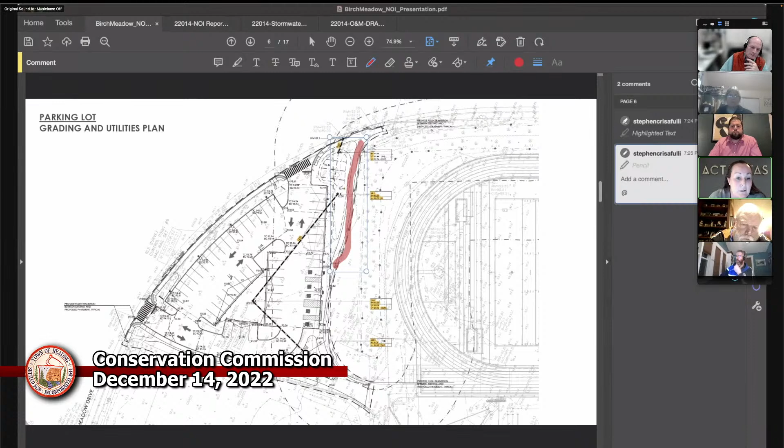The vegetation in that area—remember that orange line you saw before—you can see in the existing tree line that, for the most part, the walkway is within already disturbed area, maintained lawn, just beyond the gravel parking lot that's there now. There's one little spot near the electric charging stations where that brush wooded area juts out a bit, so we'd have to remove some brush. I don't think we have to remove trees, but Steve, correct me if I'm wrong, from that specific area. We have a bit more in the actual parking lot where we're moving some wooded area, but it's displaced from the zone of natural vegetation adjacent to the BVW.

I should say, for mitigation here, obviously we're going to have straw wattles, silt fence, and everything to make sure that during construction we're mitigating any erosion and things like that. We will have requirements for the contractor to provide a SWPPP early before they start work out there, to show us their additional measures, should they have any reason for dewatering and things like that.

Steve, why don't you go down to—I'll keep going and then we can come back, if that's okay with everybody. All right, why don't you go to the grading plan for this one, Steve?

Okay, good. So this walkway—you can see this is a long, pretty flat walkway. So the ability to actually collect that runoff and send it to specific low points or infiltration basins becomes a bit difficult. As we look at the drainage for the entire site, I didn't look at these small specific areas individually; I looked at the site as a whole in terms of the drainage analysis, because it's important to see where all that water is moving to. We're able to send so much of that water from the parking lot to those infiltration areas that we're still able to meet the stormwater standards.

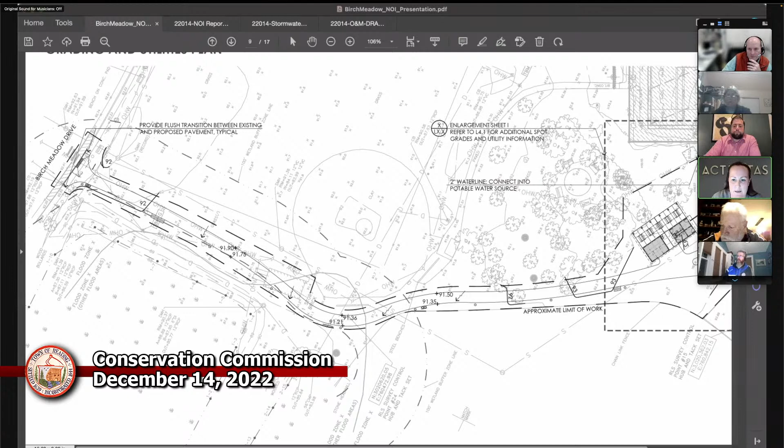That's kind of it in a nutshell. I'm happy to take questions, if there's any. Yeah, if we'd like to open it up, Chuck.

I had, can you just go over the variance request too? Yeah, absolutely. So the variance request is a request - let me just pull it up so I can make sure I get my wording right here.

So we are requesting for work within that 35-foot buffer, the 25 plus the 10-foot, on both sections of the project there. We don't really have footings necessarily involved. There's no structures, no walls, things like that, but we do obviously have the base profile associated with that gravel - this asphalt walkway here, and then the gravel walkway up at the parking lot area. So we are asking for a variance to allow for work in that area.

In terms of mitigation, we have our erosion control mitigations, things like that. We are planting adjacent to those areas as well. And then I know as part of the sidewalk, you guys talked about potentially doing some removal of invasive species in these project areas, which we would certainly be amenable to.

Okay, is there anybody on the commission that has questions for the people from Activitas?

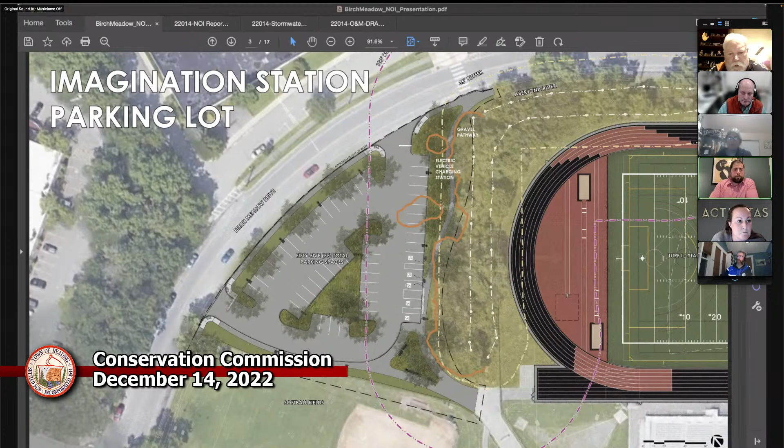For here, for this walkway? No, I was thinking it was the ADA one down across the ball fields, but you were talking about the one up by the school? No, there is a small portion.

Okay. So then my question is, did you consider moving that walkway a little bit so you wouldn't have an encroachment at all?

So right now, we're removing this green storage building that's out there, but the utility poles have to remain as part of a strategic phasing of removing the overhead electric.

Okay, so it's dodging around the poles. Yeah.

And you said this is a strategic phasing. When do you think the phase would be that would remove the poles or move them? I can't say that, I'm not going to speculate. The reason I'm asking is, could we put a condition in that once the poles were moved, then the walkway could be adjusted to stay out of the area?

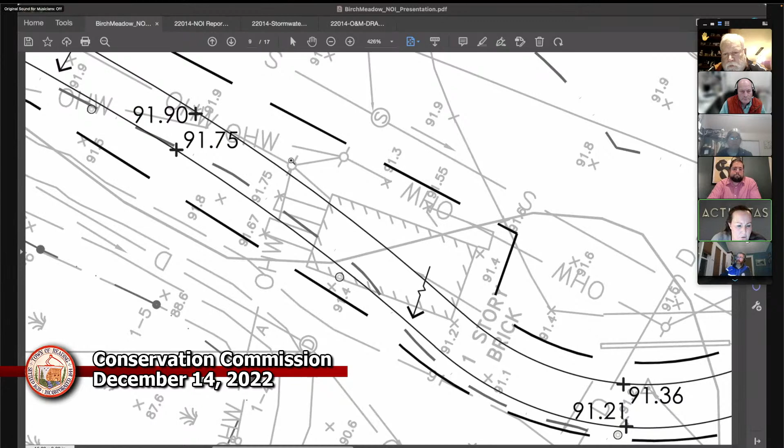I think, just think about this, Steve, because right now there's no natural vegetation in there, right? Because, correct me if I'm wrong, but that field, or the BVW area down there, is a maintained field that gets used, is that right?

For some, the wetland associated is more about less about wetland species and things like that, but it's more about the hydric soil profile, I believe, if I remember correctly. It does have wetland vegetation around the edges - cattail in particular are very noticeable on most sides of that field. But yes, the middle of the field is mowed for soccer and then flooded for ice skating in the winter.

Gotcha, that's coming very soon if not already, right? So I guess we could think about that condition. Certainly if that's - I think we could make that work. I would say that I don't know that it's necessarily gaining us a lot. Okay, so - you know what I mean? That's fine, in the interest of trying to keep this short, but that's fine. I get that situation there.

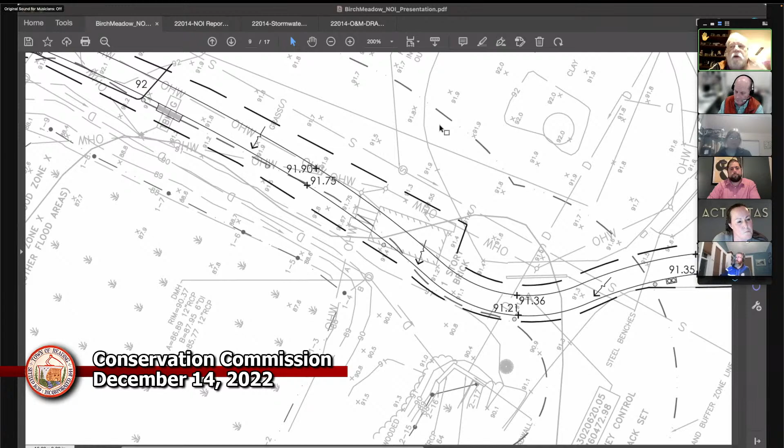The one other question I have is back up at the parking lot across from the school. You talked about the stormwater, the rainwater - what about snow? I would presume that plows would naturally push the snow from left to right, therefore pushing the snow towards that waterway over there, right? So wouldn't the surface pollutants go with it, and they wouldn't necessarily make it to any of your catch basins or treatments or the rain garden?

Yeah, I think that's a good call. I think, as part of the O&M manual, we did submit an O&M as part of a draft. We can add to that O&M manual as a condition if that's amenable to the commission, to show where those storage areas should be. Really, we shouldn't be pushing snow towards the wetland area for exactly the reasons you're talking about. So let Steve and I talk with the town internally about where that snow would go, whether it would be stored in the parking lot or whether it would be removed and pushed elsewhere. But we'd certainly be amenable to a condition saying that we need to provide more information for snow removal as part of the O&M.

And perhaps we have a guardrail kind of closer to the infiltration area, so that really starts to limit the ability to push snow in, which is good. But I can see your point.

We'll just need to make sure that we tell everyone where that snow can and cannot go. I ask because there's not a lot of great alternatives to that side. If you go up where it's curved, that's where the sidewalk is over to the school. People will probably want to cross over there and go down to the bottom, which is on the ball field. I don't know how easy it would be to push snow there, but it's a question worth talking to the town about.

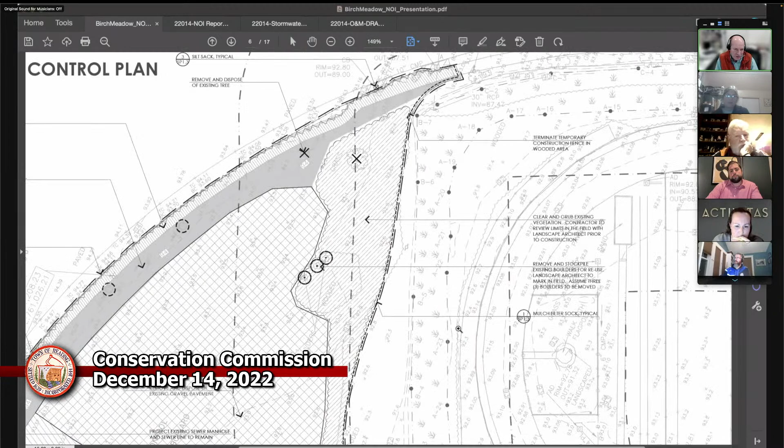On this plan, if you zoom in to where the path is, but really what I want to look at is those parking spots that butt up against the natural grassed area. Looking at the plan, I see this rough edge of vegetation that's there, but it doesn't show where the parking area is and how much square footage you've cut into this vegetation area. The new parking lot cuts into that, and from my calculation, the area seems to be about 2,000 square feet.

There's a spot screened south, and a larger spot north, and you can see where it says wooded and boulders, with some elevations, 93.1. I'm wondering, was there an opportunity to take some impervious area and create pervious area somewhere, to replace that amount of perviousness going into this parking lot area?

I also thought there might be an opportunity, even though it's late in the game, to move some of the parking area, shift it toward the left-hand side where that island contains the bioretention area. Shift it up a bit, which wouldn't make a straight line of all those parking spots. But the main question is, did you look for a spot to replace that 2,000 square feet?

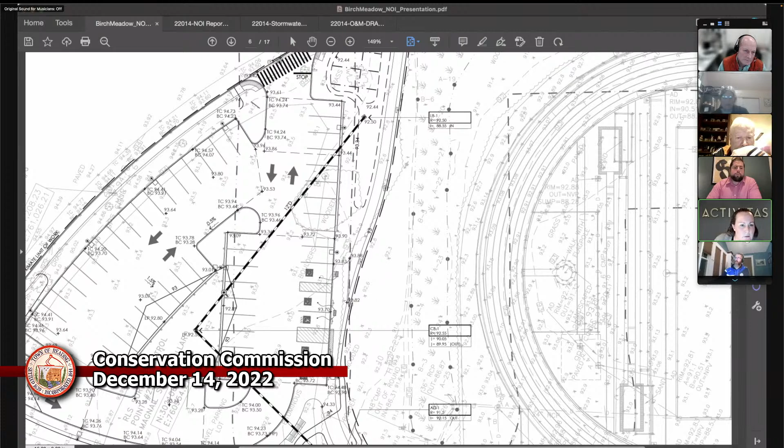Steve, can you maybe talk a little bit about planting areas? Because I think that's something we can look at in more depth to provide that, for sure. I think it's difficult doing that right adjacent to the wetland area side of the pathway. But there's got to be other areas we could fill in, especially as you go north with that gravel path. You can see the existing vegetation bows in towards the wetland, and we could start to fill those areas in, things like that, for sure.

I thought that path was interesting too, because it looks like, I was wondering, is it pavement, that paved parking or paved walking path that enters into the gravel walking path? Is there an opportunity to increase the gravel and eliminate more of that paved walking path? I think that's up by the roadway, it seemed to be like a cutoff line. I thought it was lower down, but...

I don't know where that line is, if it's under this, but it really should be that. Well, if it's not there, that you've picked up some, and maybe at the other end too, there's an opportunity.

Where it's paved here? Well, I'm only talking about the path. I think the pavement's needed, that's probably where most of the people are going to go, but it's hard to tell where it changes from stone to pavement on this plan. But if there's an opportunity, maybe that's where you can pick up some of that 1,500 square feet.

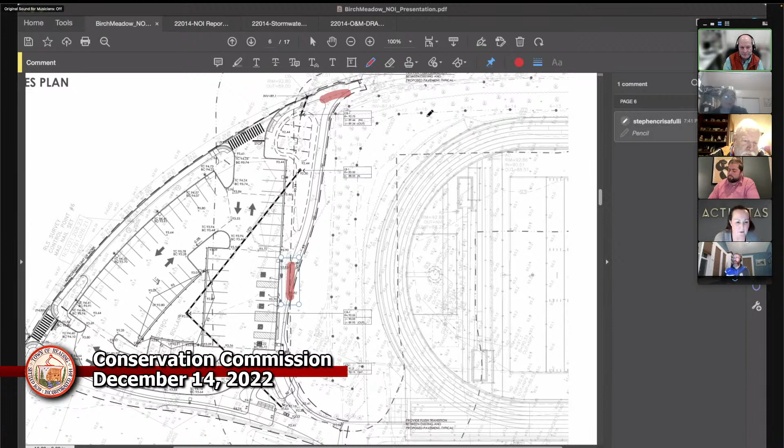Yeah, sure. So it's funny, I wanted there to be storage, but there really isn't. It's not because we can't provide the storage, it's actually because I can't treat that water before sending it to that storage area, because that storage area, unless we line it, is going to want to infiltrate.

So from a treatment standpoint, I need that deep sump catch basin in the middle to actually collect that water and then send it to the rain garden, page north there, to either continue to outlet by the leaching basin or overtop the leaching basin and then go to that rain garden.

So there's just not a lot of space there. There's different things you can do to allow for that treatment, but that triangle gets so small, like you want at least almost 15 feet of grass area to treat it to meet that standard.

So that's where I got stuck, because I wanted to use that area for detention as well, but I couldn't make that model work in terms of treating it first before allowing it to infiltrate in that area, if that makes sense. It sounds silly.

But even if it couldn't be added to the calculations, it seems like there could be something, because if you have some of those smaller storms, and obviously if this is a grass area — one of my questions was, what is happening to these areas? Because in the details, one of them says plants and seed mix.

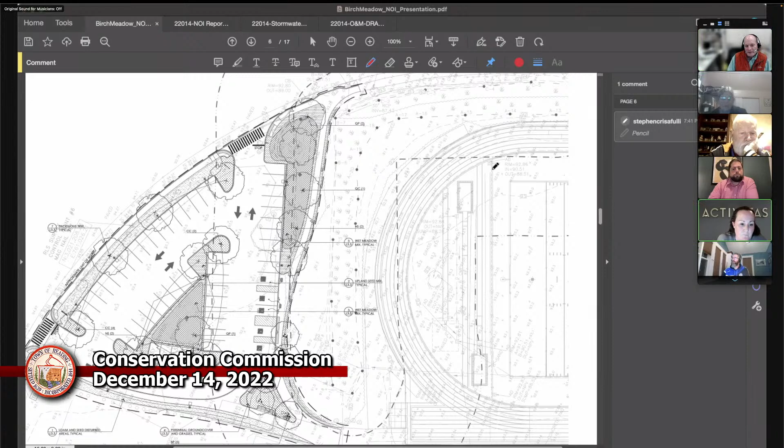I did have a question. It looked like once it goes in that storm drain, it diverts into two directions. I understand page north, the bioretention area. Is it going down to the bottom, page south also?

No, so page south is going towards that middle island. Okay, yeah, and then it's traveling that way. Exactly, so it's picking up whatever's happening in the pathway and the center area, and then...

And what size storm are we capturing here? What are we looking for? I mean, we model up to the 100-year storm per the regs, so we are designed to handle pretty large storms.

We shouldn't see ponding in the page south and page middle areas, if you will. We will see some ponding as part of that infiltration and rain garden area in that larger storm. But in the small storms, like the 2-year, we shouldn't really see standing water anywhere.

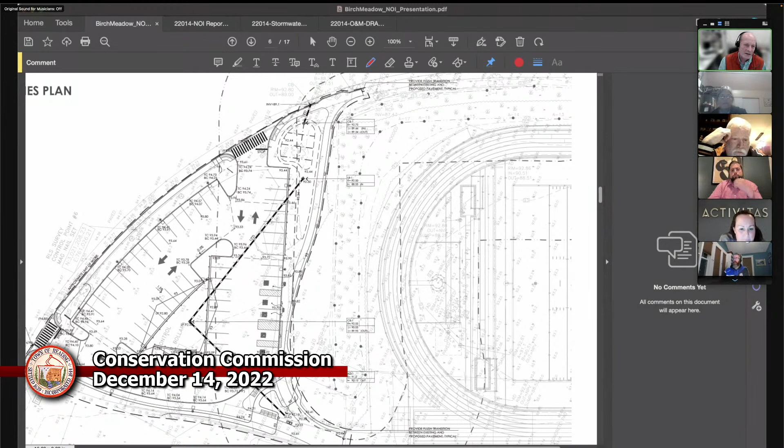So I can't read the invert. It's like... 9278. So 9278 is the 100-year storm. So when it starts to discharge at the 100-year storm, a 24-hour 100-year storm. Yeah, let me, you know what, I can get that number for you.

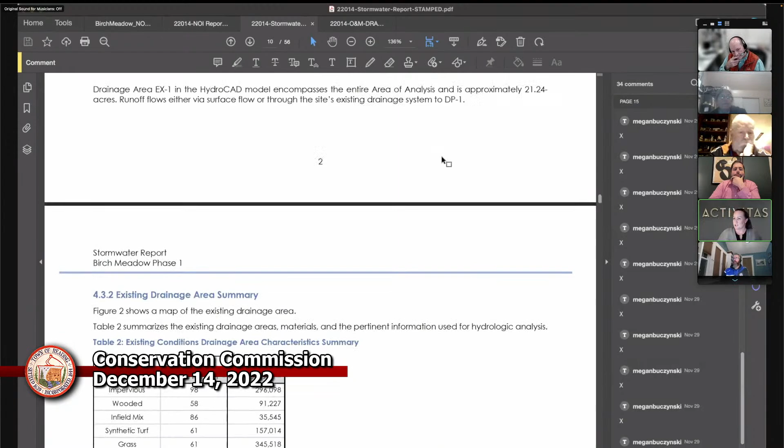What is it, the NOI or the stormwater? For the stormwater, let me go to the 100-year. And let's see, my pond AP. So where am I here? So my peak elevation in that 100-year storm is at 92.

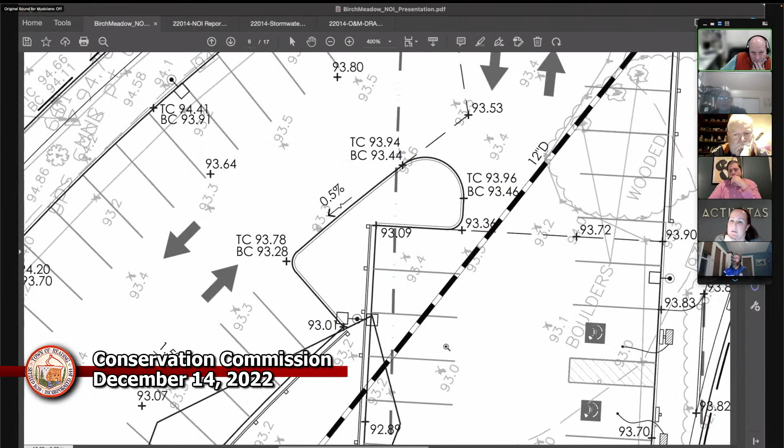Steve, I'm sorry, why don't you go back to the plan for one second? Yeah, so 9278, I think it was, is the invert. So, Steve, why don't you zoom right into that infiltration area up top? Sorry, the up top one. There we go. So you can see... oops.

There we go. Yeah. Okay.

We're getting water in that leaching basin, and our rim is up at 92.5. So water from that middle area is able to get in there and naturally overtop. When all of these systems are working together, we're going to see most of that not ponding in - it's going to go into that infiltration area, but we shouldn't see standing water even in those larger storms, because the soils out there are B soils, so they're reasonably well draining, which is great.

That water is able to go through that rain garden profile and go right through. The way I have the infiltration basin modeled, we have that rain profile, and then the outlet from that catch basin at the top with the pipe only gets up to elevation 92 within that profile. So ponding-wise we shouldn't see much, but we will see water coming out of that leaching basin initially to get into that area.

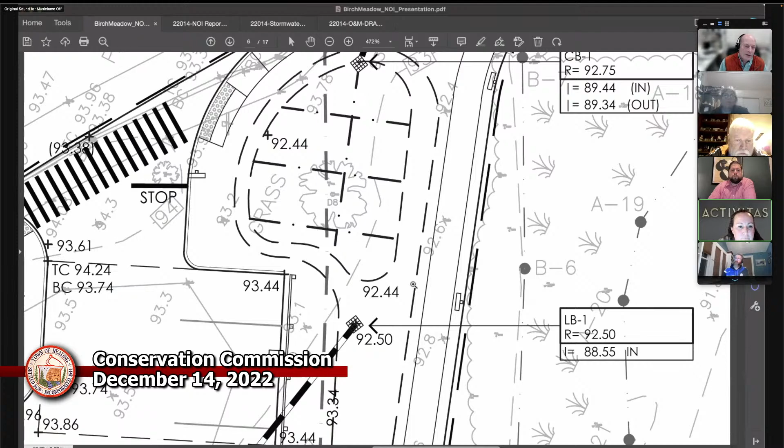Okay, yeah, that's great. It seems like there's a lot of area that it's taken care of. I mean, everything is being directed in there, and the center area that doesn't hold back any of that water really seems very important to try to hold back something.

I know you looked at it - is there any way you can? So before you do that, what was the reason why it wouldn't work? I mean, because you said it wouldn't. It needs to be bigger to make any difference.

So by the stormwater handbook, when you send runoff to an infiltration basin, you have to treat the water - you have to do some pre-treatment to it. If I included that middle triangle as a detention basin and I'm just sending water, I'm not treating it enough. So from the handbook standpoint, it's not clean enough that we want to be sending it into the groundwater.

So when I do my treatment train and my TSS, we are accounting for street sweeping in the parking lot area, and then I account for that deep sump catch basin to treat that water, and then send it to that leaching basin, and then overtop into the infiltration basin for infiltration.

But I think to your point, Chuck, what we could do - because I have the rim of that catch basin in the middle at about 92.5 - we could raise that up. Water's still going to get there, but we could slow it down. I think that would help, to your point - we can use that area to decrease the flow of the water, to slow it down before it moves over, which I think balances out with what you might be looking for.

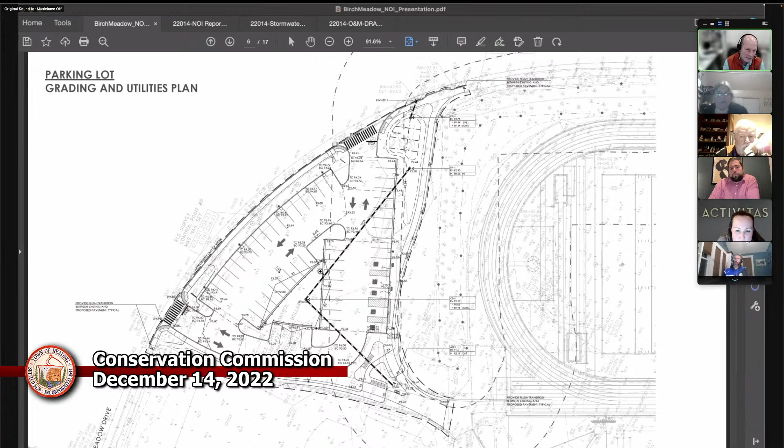I was wondering where groundwater is, because we know the elevation at the bottom is 92 something. I wrote it down, I really can't see it - 92.44. Is that where it is over there? Yeah, we're at about 92.5.

Right, so if you're not in the groundwater and you use a wetland seed mix - I think Steve and I can talk about that. We could probably turn that into more of a meadow mix. So we're not going to have the hydric soils, but we can still have the taller grasses, the wetland flowers, meadow flowers, things like that, which also helps slow down that water and provides treatment on its own into that area, as opposed to just having maintained, short grasses.

So this one down here, I think it would benefit from some shrubs, but is the other one at the top of the page, the north screen, going to get some shrubs mixed in with that? Or is it just going to be grasses?

As of right now, there wouldn't be shrubs planted, but there are shrubs within these seed mixes. The seed mixes were submitted on the planting detail sheet. There's two types, even though the supplier terms a couple of them wet meadow - it's not necessarily a wetland planting mix, but it's a mix of native grasses and shrubs. That'll come up within the first year.

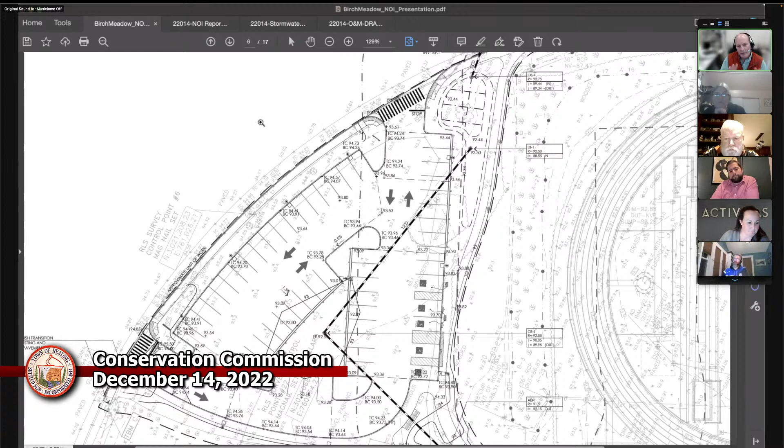So I have some concerns about snow plowing and where that stuff is going, pushing it into the rain garden. Hopefully there's enough guardrail to prevent that from happening. And the operation and maintenance plan takes care of things like spring cleaning.

So the photometrics, yeah, this is a good one. That area off the parking lot seems to be elevated a little bit. Can we get down to 0 as soon as we hit the grass? Or maybe even at the edge of the path? Is that possible?

I think that's the stream where it's 0 now, but if we bring it back to the path, would that be possible? I don't know if that makes a big difference, or if these slight changes can happen.

And then you have some numbers that are pretty high in here, like 3.0 just off the grass, but right next to it is 0.9. So I was wondering why we're getting that fluctuation.

That's kind of center screen of the photometric, right in there. Am I seeing 3.3 next to that? 0.9, yeah, yeah, 2.1 to 0.4.

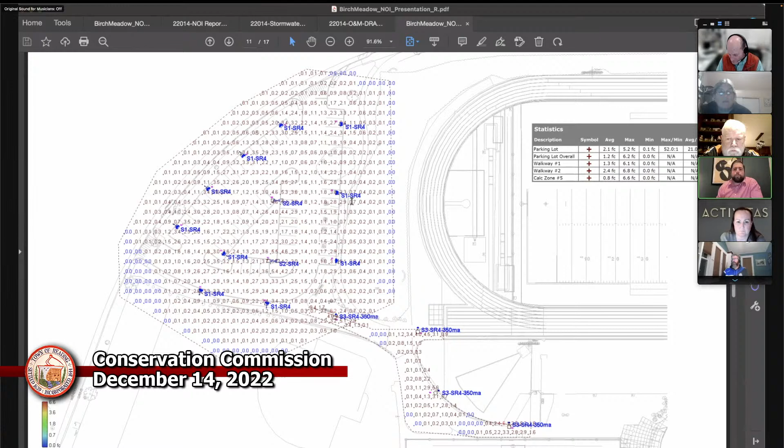We're continuing to have that conversation with the town and public safety. And the same request is for where the Aberjona is.

Up at the other side, near Castine Field and the walkway, where it dips down over the head wall, I guess, the opening of the culvert where the Aberjona is, right there.

Now I understand the pathway drops there, everything drops, but maybe if we can just pull those back a little bit. Yep, we can take a look at that again.

And then I just wrote on here, this will be my last questions. I'll write my questions down and any of the commission's questions and send them to you. The ones I didn't get to, you'll come back to because of the file number.

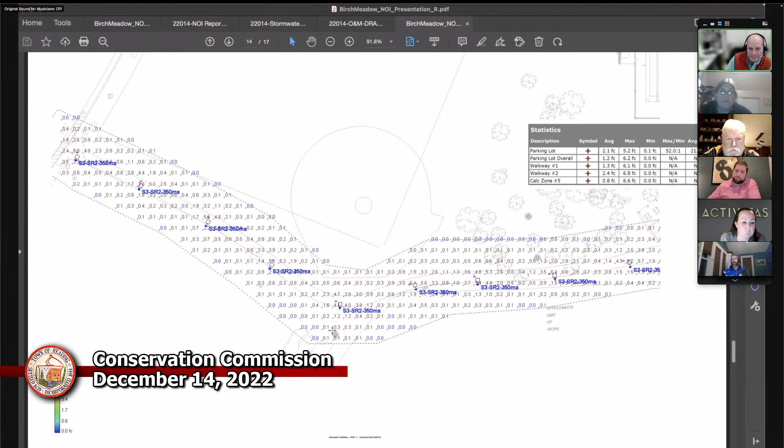I was wondering if there was an opportunity to put a bench on the path we're talking about, for that Imagination Station area, somewhere in there to have a bench. I'm imagining this is a much better environment than it is now. It gets mowed a little bit, is nice. We have the flowers and the streams cleaned up because you're doing the invasive removal and all that, and that's getting monitored. So it would be nice to think about, and I know every bench costs that much more, but that's my request for this area too.

Yeah, that's what I have, Chair. Okay.

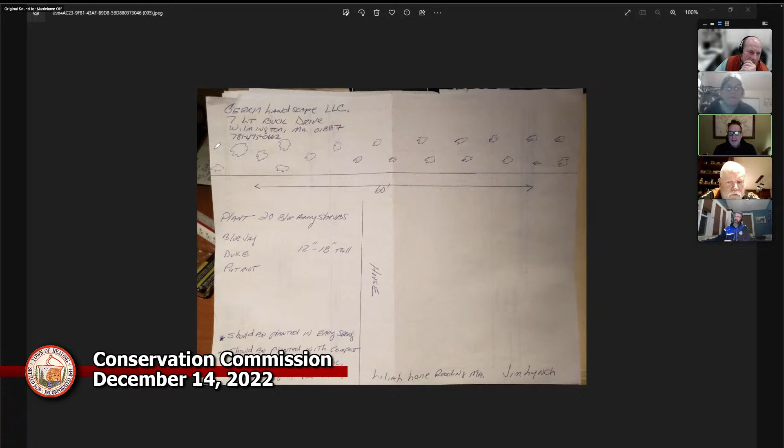Okay, so Lilah Lane is here. Yeah, Lilah Lane would be, yeah, all right, sorry. Just quick, I didn't know if they wanted a professional plan or just this, 'cause I did the house next door, 31 Lilah, the Prior's house, and we planted about 15 or 16 blueberry shrubs back there, and they're doing pretty good now, actually.

So here's the house, yep, that's a pool. Here's the wetland, Lilah Lane, and this is the side of the house, yes, left side. Okay, anybody on the commission have questions for the presenters?

Okay, so we're only concentrating on the side of the house. I know there was some trees in the back of the house. Are you still proposing to remove those trees?

You told me on the left side of the house where... okay, hold on, let's see what Tom says about that. So right now, Mr. Garin Landscaping only said that it's the left side of the house where that row of trees is coming out. That's where he's gonna do the planting.

So we still have on the agenda to take out all the trees we discussed, but you wanted a planting put in with a specific amount of plants. Talking with the homeowner, Jimmy Lynch, I assume Mr. Garin was talking with them, they decided the planting, instead of putting it behind the house by the wetlands, it would be better to put it in between the houses, so it still gives a buffer. That's what I'm getting out of it.

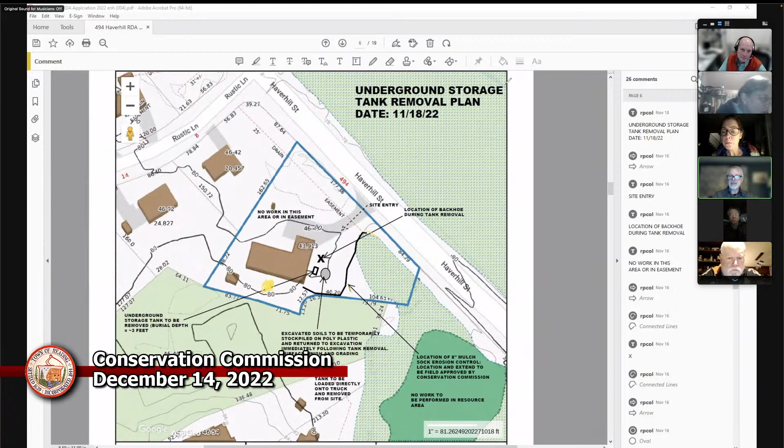Okay. All right, so this gravel area... Okay, that answers my question.

All right, we have a lot on our plate. Are there any more questions? Carl, you've still got your hand up? Oh no, I just answered, did mine. No, I'm good. Any members of the public here who have any questions, please use the reaction function and raise your hand. Seeing none, can I have a motion?

So I'll make a motion, this is Brian, for a negative determination for 494 Haverhill Street. This is John, I'll second. Brian Bowe in favor. John Sullivan in favor. Carl Sacconi in favor. Martha Moore in favor.

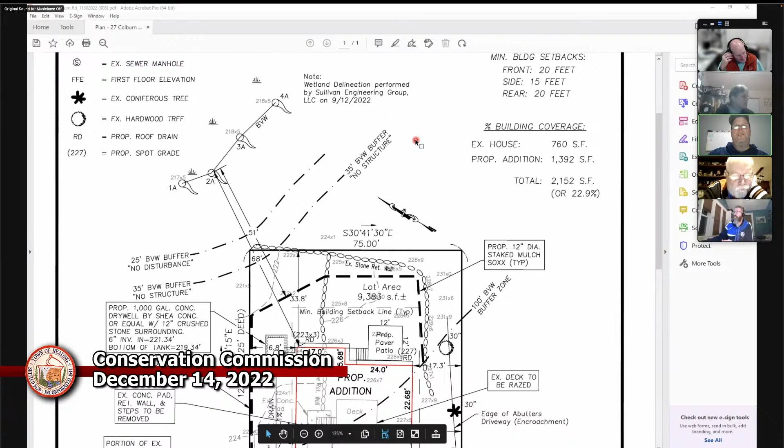As some mitigation, we're looking to collect... what do I have going in there? I have a 1,000-gallon dry well with 12 inches of stone surrounding. That'll collect the addition roof area, so there's roof drains that will tie into that. Additionally, the driveway will pitch back to the house. The driveway, as I stated, is outside the 100-foot buffer zone, but there'll be a trench drain, and that'll be drained back to that dry well as well.

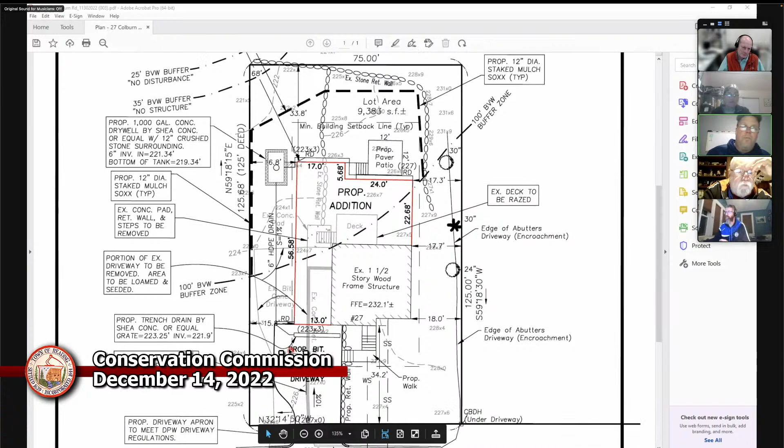So twofold, we collect some of the roof area and we collect the driveway runoff. So, Jack, can you combine those? Roof runoff is clean, driveway needs pre-treatment. Yep, I probably should put some pre-treatment on it. That's a good call, Chuck. I should put some sort of pre-treatment structure in line from the trench drain to the dry well.

And that about does it. They are proposing a paver patio, 12 by 12, in the back, right in that area. And the rest of the area within the limit of work, which is currently grassed, will just be reloamed and reseeded in the backyard. I'll turn it over to the commission for any questions you might have.

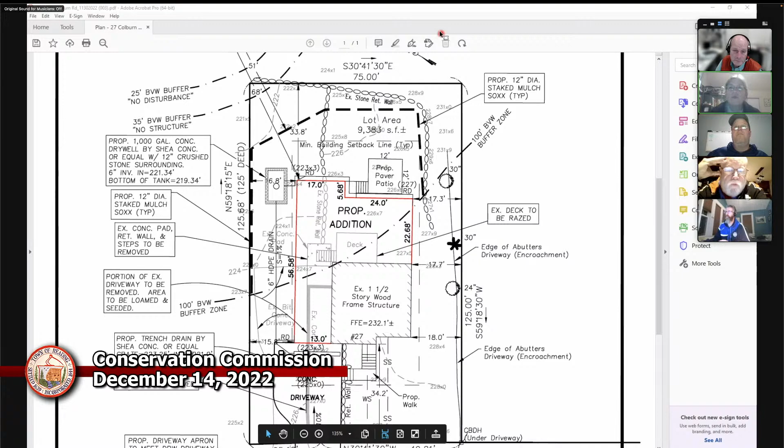I see at the top of the plot plan, just out of view right now, you've got square footage. I don't see any place where you've accounted for all the impervious surface that you're taking away, like the driveway and the deck and the concrete pad. Does that really matter?

Not in this case, because we're not in the Aquifer Protection District. We're not within a riverfront area. Above where the site plan is, I do a percent building coverage on the house and the addition, but that's for zoning compliance to show we're under 25%. Typically if I was in the Aquifer District or if this was a riverfront property, I'd want to quantify the amount of impervious removed and added, but in this case it wouldn't apply.

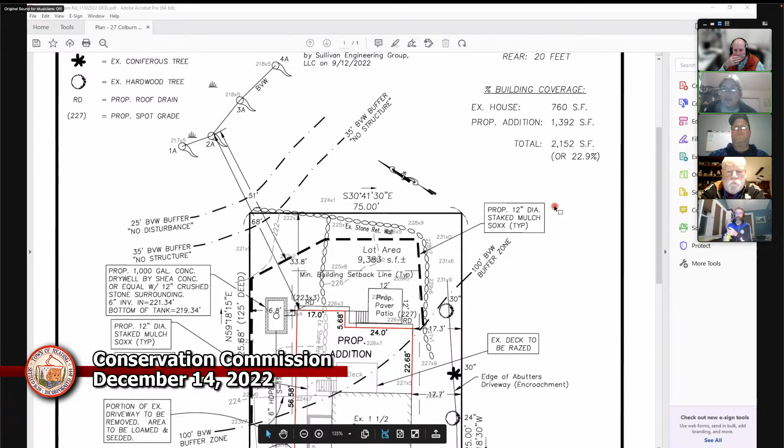Okay, thanks. All right, so I think we can go through this relatively quickly because it's so far from the wetland. But are there any questions from members of the commission? I don't see any. Okay.

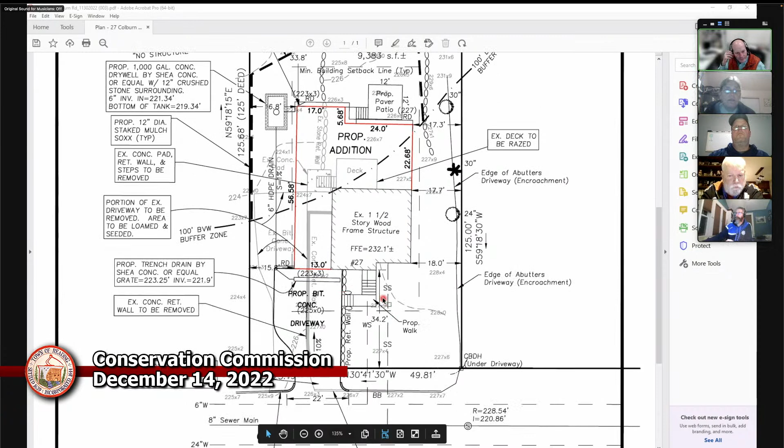Chuck, do you have anything you needed to ask? No, I don't have any questions outside of the notice or the determination that we sent out to you for this. It'll require 72 hours notice. And then I'd like to get a construction schedule, which I don't usually ask for RDAs, but it would be good to get it on this one. I can have the builder put together a construction schedule for you, Chuck.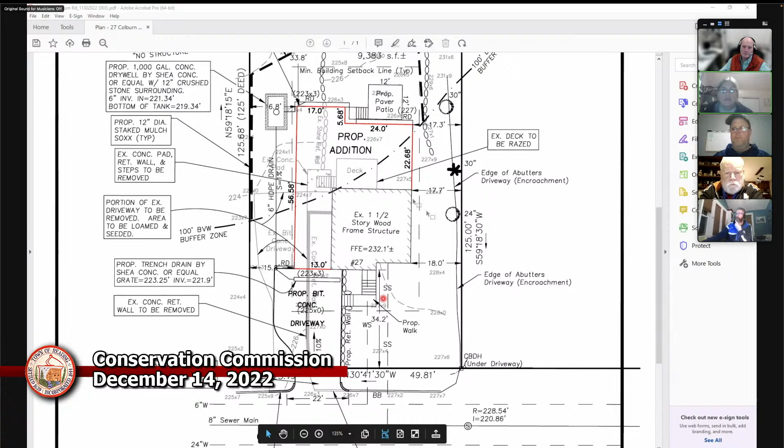Are there any members of the public that have comments or questions on this? Just go to the reactions tab and open that, then click the raise hands function. Okay, all seeing... right, none?

Yeah, I think it looks pretty straightforward. It's far enough away and you've got the stormwater control, the erosion control, infiltration—yeah, that's what I meant, stormwater. Yep, dry well infiltration. So are we good? Anybody have any last questions or comments?

That's amazingly fast. Okay, can we have a motion? This is Brian, I'll make a motion for a negative determination for 27 Colburn. This is John, I'll second. Brian Bowe in favor, John Sullivan in favor, Carl Sacconi in favor, Martha Moore in favor.

Okay, Jack, is that a personal record? I was just going to say, that was fast. Yeah, thank you, Jack, everyone. All right, I know what you want on the plan, so I tried to. I was going to say, yeah. All right, thank you, everyone. Yep, all right, good night. Okay.

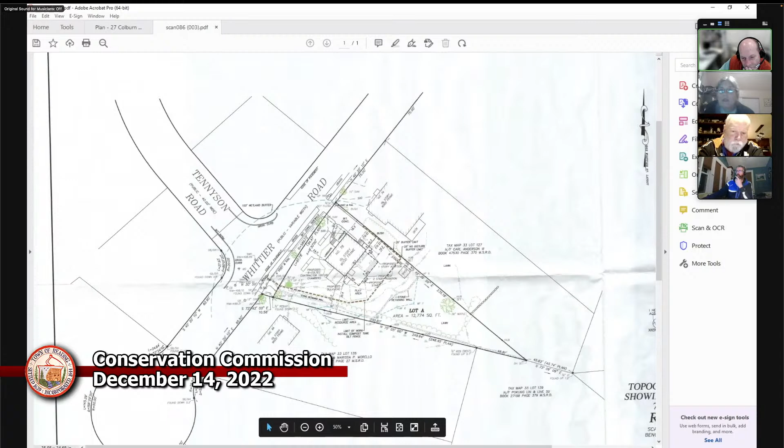Yeah. So Ed, are you there? I don't think I hear Ed. Did you give them permission to unmute? Yes, I did. They have all the permission. I'll ask them to unmute too. Okay.

All right, so we can just continue on. So there was some discussion about the swing set, and I think the chair had a condition regarding the swing set. I would think that within 10 years their children would be old enough that they don't really need the swing set anymore. So I was going to suggest that we approve the order of conditions, but say that they should remove the swing set within 10 years, or if they are going to sell the house, they should remove it then. When they remove the swing set, restore that area to lawn, take up the boards that frame the mulch area around the swing set, and just make it into lawn. So that's my one proposal. Other than that, I think we can approve this order of conditions.

Is that acceptable? I see that you're unmuted. I don't know which McColgan this is. Ed? Nope, you got nothing. Okay, and what about members of the commission, does that sound like a reasonable situation? Sounds good to me. Yes. Okay, okay.

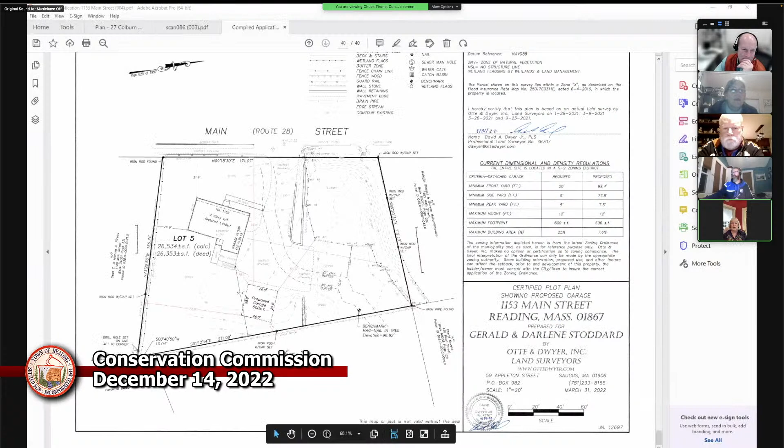I would like to add that the wetlands on this property were delineated by Bill Manuell. If you've been out to the site or looked at the supporting information, you'll notice a fairly significant portion of the lawn area at the north end of the site is included in Bill's wetlands delineation. There's a small intermittently flowing stream that runs parallel to the northern property line and then goes underneath Main Street. But the bulk of the wetlands vegetation is right along the stream channel, and the hydric soils are what Bill pulled into the delineation throughout the lawn area.

The garage that Mrs. Stoddard is interested in installing is located 50 feet from the edge of the wetland, so that we meet your general performance standard for structures being outside of, I believe, the 35-foot zone.

If you've been out to the site, you'll notice the driveway is configured, and has been for quite a period of time, to accommodate a garage in this location. It looks like they had planned on this at some point in the future but never built it. There's an existing small retaining wall to the north of this proposed location that actually appears like it may have been part of an old structure in the past. Right now it just acts as a landscaping feature, I think you'd say.

In any case, the garage we're proposing will not have a full foundation, just a footing at the perimeter of the building. We've included in our notice of intent filing a description of a 12-inch Filtrexx tube filled with compost material, which we'll use as our limit of work line.

On this particular property, I think the limit of work line would actually follow the northern edge of the driveway and wrap around to the eastern property line behind the rear of this building. That's the way the site naturally grades out, and the driveway would be accessible to construction vehicles.

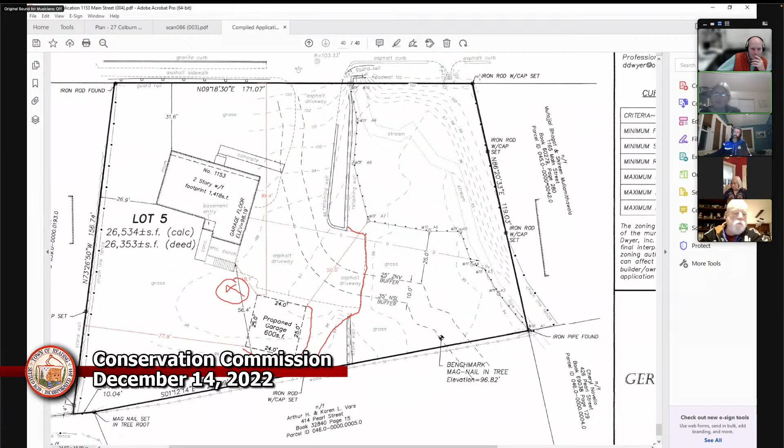Okay, is there anybody else on the commission with questions or comments? All right, can we take down the plot plan and see if there's any members of the public who want to raise hand? Looks like there is somebody with a hand symbol.

Mufadal Bagat. Can we let that person unmute? It's funny because I'm not seeing that, but I will unmute that person. Oh, it went away. Oh, maybe it was just my cursor, sorry. My cursor was looking like a hand when it was on top of somebody's picture. Oops, okay, so any members of the public here do a raised hand symbol of some sort?

No? Okay, all right, since we can't close tonight because we have no DEP file number, can I have a motion to continue to the January 11th meeting? I can do that, but first we should get agreement from the applicant that that's okay. Oh please, I would request a continuance until your January 11th meeting to allow us to get a file number and come back to you with several pieces of information.

Okay, in that case, this is Brian, I make a motion to continue this until January 11th. This is John, I second. And before we vote, Chuck, did you have something you wanted to say? Brian said what I was going to ask. Okay, fine, okay, please vote.

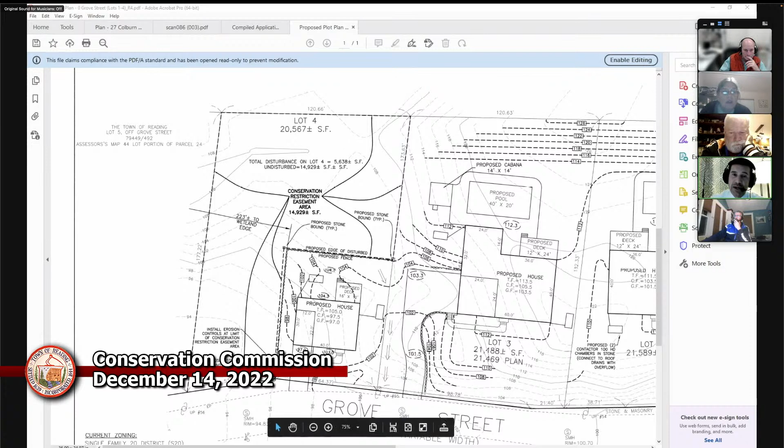And we actually intentionally went with Mass Wildlife and expanded the protected area just to try to make this a simpler determination. And it needs to be said that Mass Wildlife also looked at all 4 lots and put a restriction only on one. So you're not going to see it on 3, 2, and 1. It's just lot 4 that got the bulk of this conservation restriction. So I guess in a way it's more palatable that way. So I like what Josh had said.

I don't know if others want to review the conservation restriction, but the process that Josh laid out about incorporating the comments and providing a clean copy and that marked up copy to Ivrea, I think that we would need to agree to let him do that tonight. That's what we want to do if it's possible.

I feel like I've looked at what I sent Josh enough, and I don't have any more comments. I'm not saying I won't when I talk to Ivrea or look at this again, because you get a different perspective. But all in all, it was just some of the things that we don't allow in town that had to be taken out. I didn't think there would be an issue. So what say others on the commission?

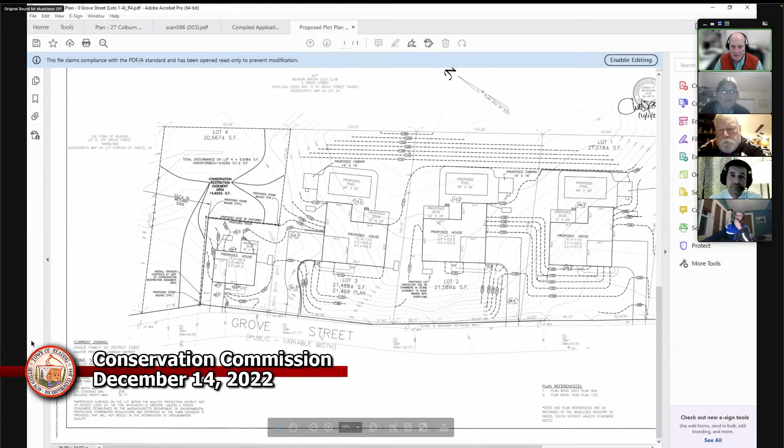Just to say, I haven't had a chance to review it in much more detail, to Martha's point. Okay, so you'll have an opportunity.

Yeah, I don't want to get on the other side of this too much, but there was little time. I think I got it last Thursday or something like that, sent to the commission, asking for comments before, I don't know, Tuesday at 1. And I know that a lot of you guys work and whatnot. But on the other hand, I think we're running out of time. I think we want to be sensitive to all the work that's been put into this project and the opportunity for us to comment on Ivria's discussion with Josh and that document.

So we sign before the select board. So there's that opportunity to look it over. Carl, you can certainly make comments on the document now, and I can get those right over to Josh and Ivria at any time those come up or come through. And that's for anybody else also.